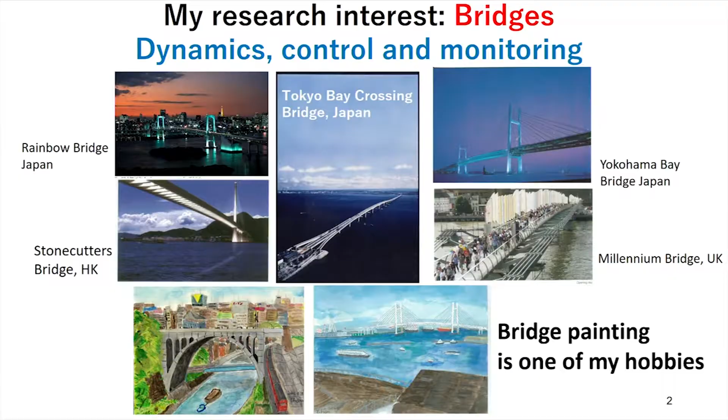So today's topic is wider: infrastructure. We have various kinds of infrastructure. Can I have a pointer here? Yeah, various kinds of infrastructures. This is in Tokyo, Japan.

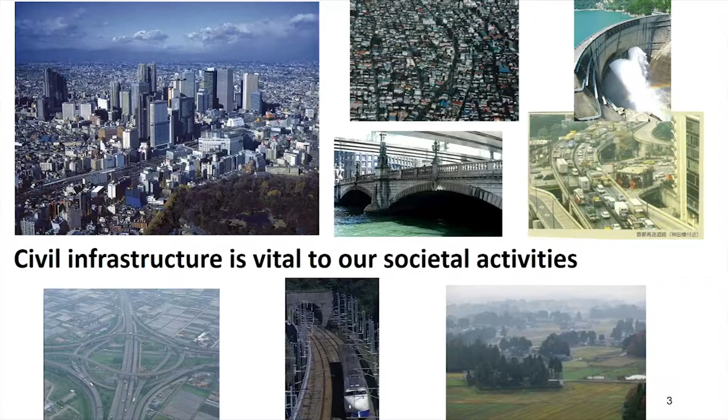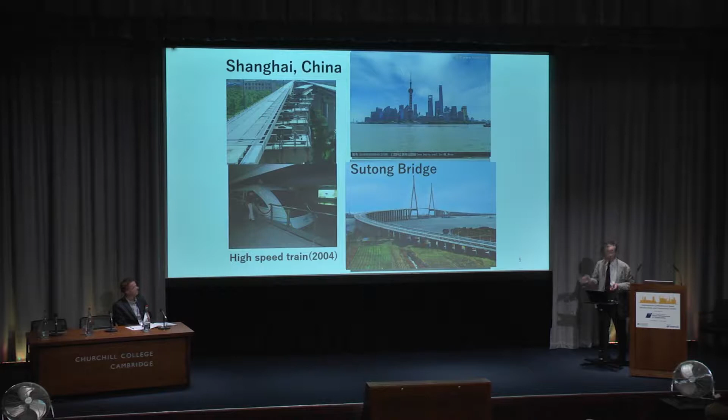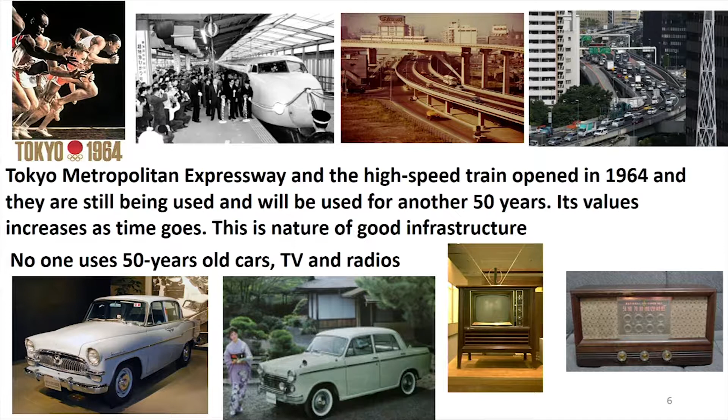Back to Japan, we will have the Olympic Games next year, but we had the Olympics in 1964. That's about 55 years ago. At that time we built a high-speed train and urban expressway, and they are still in use, of course. This urban expressway carries millions of vehicles a day. Even though the structure is degraded and damaged a little bit, the value of the structure has increased, and this is a good example of nice infrastructure.

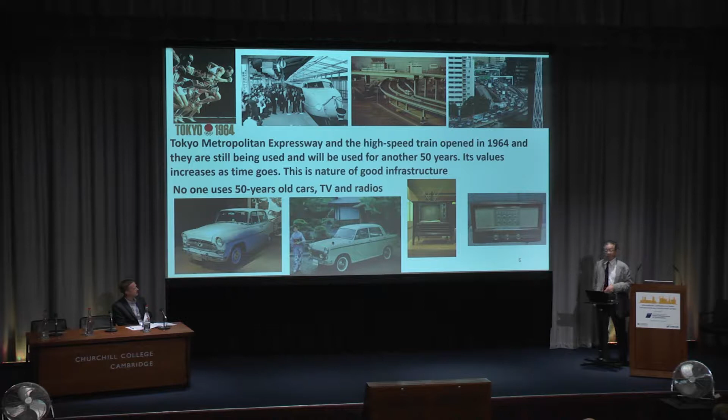One professor, Uzawa, studied in the US, was a professor at Chicago, and returned to the University of Tokyo. He was very close to the Nobel Prize in economics. He proposed the concept of social common capital. According to his definition, this is an asset for the society, public and not private.

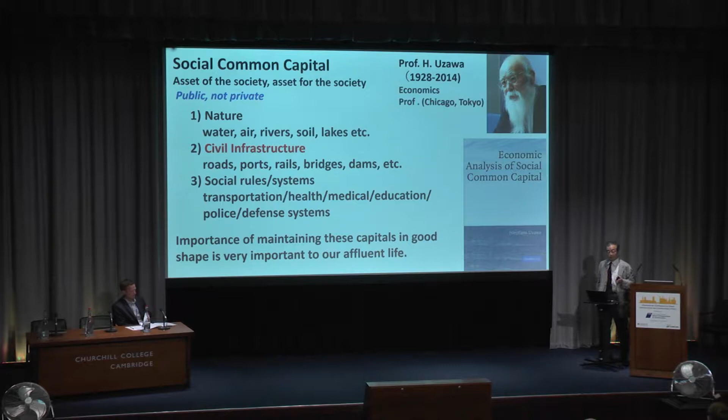He classifies three types: nature, water, air, which no one can own; civil infrastructure, like we are dealing with; and social systems, rules which apply to everybody, like medical care or education. These three are very important social common capital, so our infrastructure is one of them. He stressed that maintaining these capitals in good shape is very important to our rich, wealthy life.

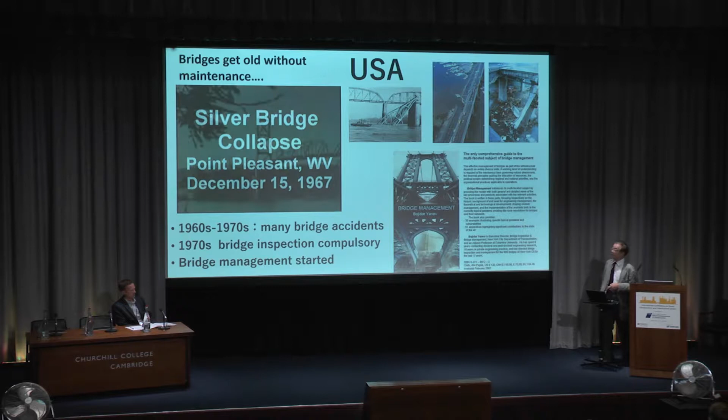The road hung from a simple, elegant chain design made possible by a new type of high-carbon, high-strength steel.

And this is like a chain. This is a chain. Of course, no one inspected it. No one took care of it for many years, 30 years, 40 years. And one day, Friday evening, the bridge collapsed.

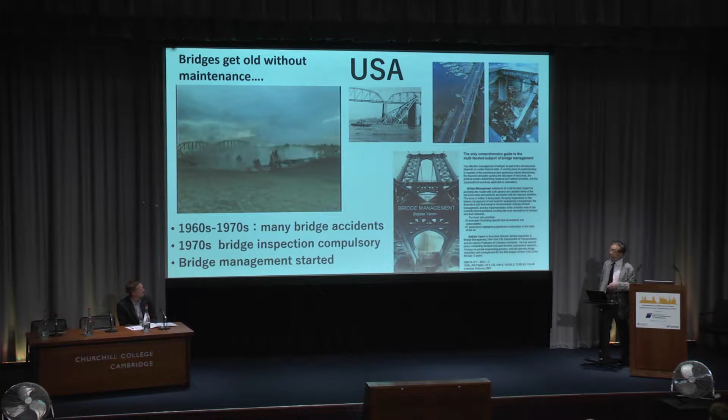It was a Friday evening, so many cars, and 46 people were killed. This is an animation, not real video. The bridge was falling. With this accident, we really realized that we need inspection, we need maintenance. That was the wake-up call in the U.S. After that, there were some accidents in the U.S., and in the early 70s, the U.S. introduced compulsory bridge inspection. So for 40 years, they have been working on bridge management, and there's a book, Bridge Management, written by one of my friends, Yanev. That is the current situation in the U.S.

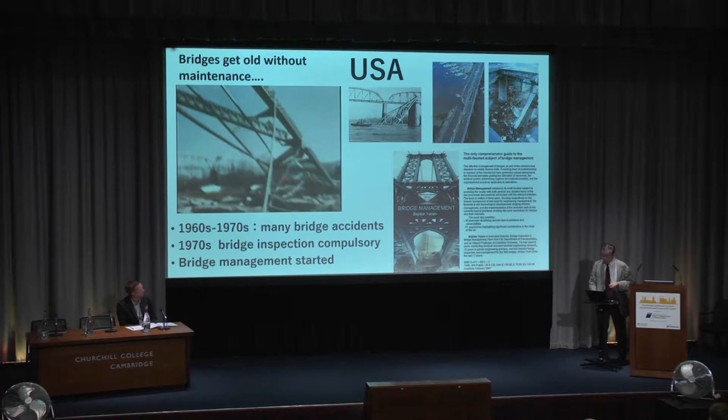Of course, there are many wake-up calls in Europe. This is one example in Vienna. And even last year in Italy, we had a very bad accident, and I think more than 40 people were killed. Of course, there are many reasons, but one reason is that damage in bridges is very often not visible. That's the problem. So we need technical development.

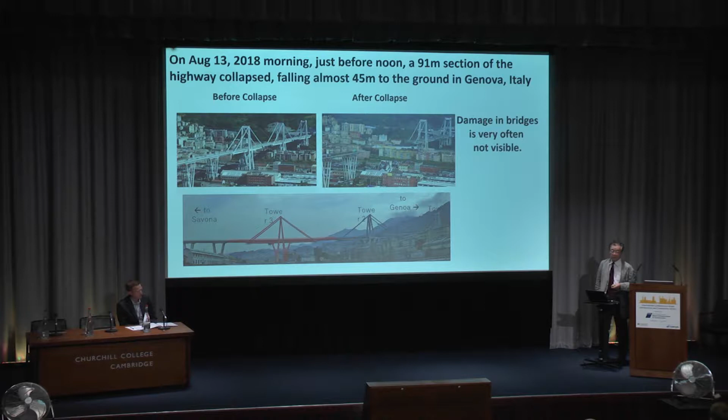This is a video, but I'm not sure this works. It's a video I got from YouTube. The bridge, I think the pylon collapsed. I don't understand Italian, but someone is shouting.

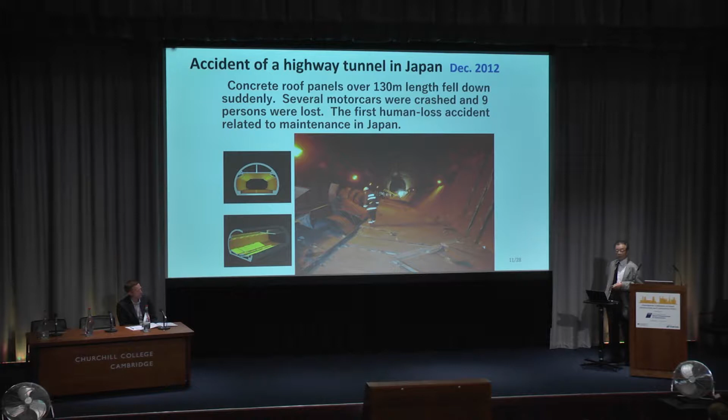Also, we had an accident about 7 years ago. This is a tunnel accident, and there's a roof here. This is an air conditioning, ventilation roof, and it collapsed over 130 meters. Very fortunately, not many vehicles were there. Only 9 people were killed. It could have killed almost 100, because a 130-meter ceiling roof fell down. So I think this was really a wake-up call to the public in Japan.

The Council for Science, Technology and Innovation, Cabinet Office, chaired by Prime Minister Abe, is the top commander in the policy of science and technology. This CSTI identified the safety of infrastructure as one of the nationally important research and development themes.

At that time, in 2013, CSTI proposed to conduct a Strategic Innovation Program with 10 themes. This was the first experience for CSTI to really conduct their own project. Ten projects were selected, and one of them is infrastructure maintenance.

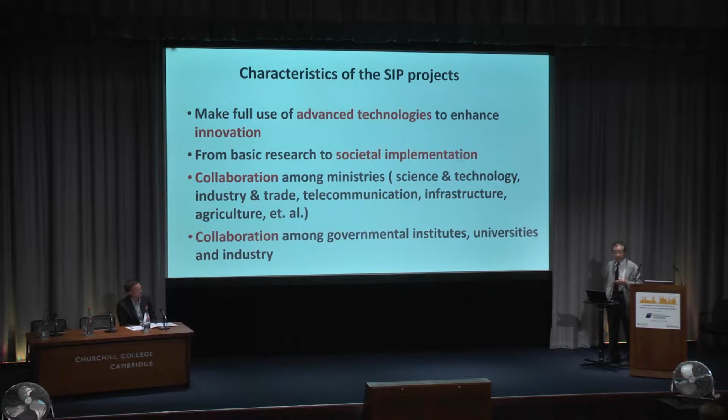The characteristic of the SIP project is, as the government says, innovation using advanced technology. So make full use of advanced technology to enhance innovation. That's one idea. From basic research to societal implementation, so you have to develop and also implement in society. Collaboration among ministries, and among governmental institutes, universities and industry. This is kind of my thought.

30 years ago, we were civil engineering, but advanced technology like nano-bio was much ahead, very far. I felt the long distance between the two groups. But advanced technology also changed. Nowadays, IT, robots, and so on. Now I feel, maybe in the past several years, civil engineering infrastructure and advanced technology are rather close, like this picture.

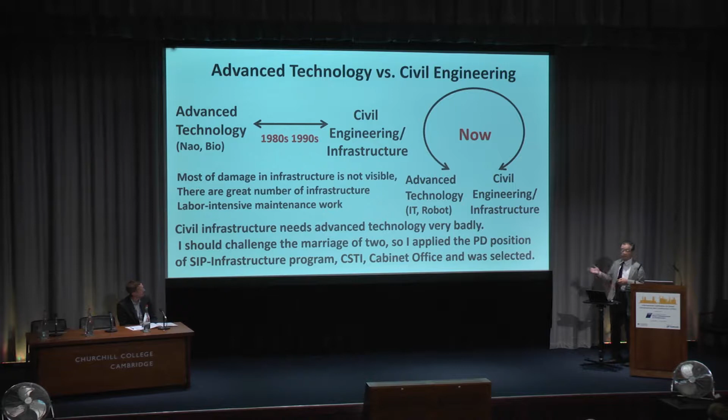And most of the damage, as I said, is not visible. So you need some technology to identify the condition inside structures. There are a large number of infrastructures you have to deal with. At this moment, maintenance is very labor-intensive work. So I thought civil infrastructure needs advanced technology very badly indeed. I should challenge to combine the two technologies. So I applied for the program director position at the Cabinet Office, and I was selected.

Another background is my motto, or attitude to the SIP or research: I think I should follow the past president, Furuichi. He was the first president of JSCE. In his speech in 1914, more than 100 years ago, one of the statements is, civil engineers are to be the leader of leaders, persons who have strong leadership. That means we should coordinate many technologies for civil engineering purposes.

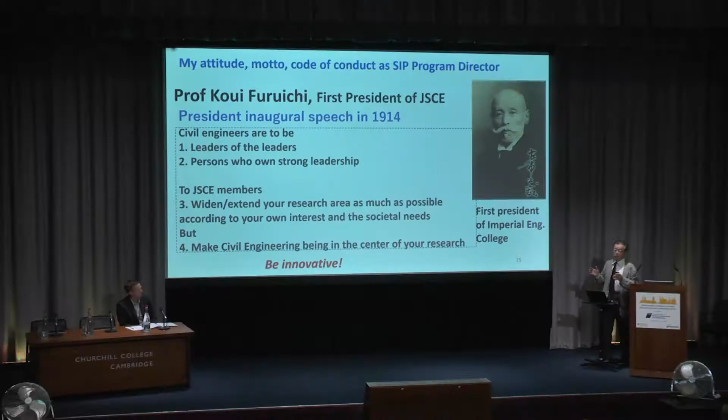Also, he said JSCE members should widely extend your research area as much as possible, according to your own academic interests or societal needs, but make civil engineering the center of your research. So your research should be targeted at civil engineering. That's his statement. I like this statement. So as chair of this SIP, I always keep these words in my mind. He also says that you have to be innovative. I feel this from his statement.

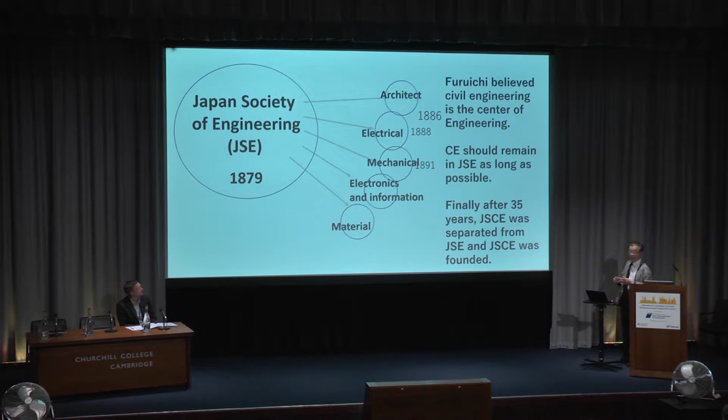A little explanation. Our society, the Japan Society of Engineering, was founded in 1879, so 140 years ago. After 7 years, the architect group separated. After almost 10 years, the electrical group separated. Mechanical, all large groups separated. But Furuichi said that civil engineering should be the center of engineering, so we should stay as long as possible. But finally, after 35 years, in 1914, civil engineers, JSCE, separated. So we stayed, but finally we separated.

Go back to the SIP. At the end of 2013, the 10 themes were selected. Many are driven by large companies like Mitsubishi, Toyota, Hitachi. 5 are from academia and 5 are from industry. I thought maybe the Cabinet Office thought about the balance. I am one of them, about infrastructure.

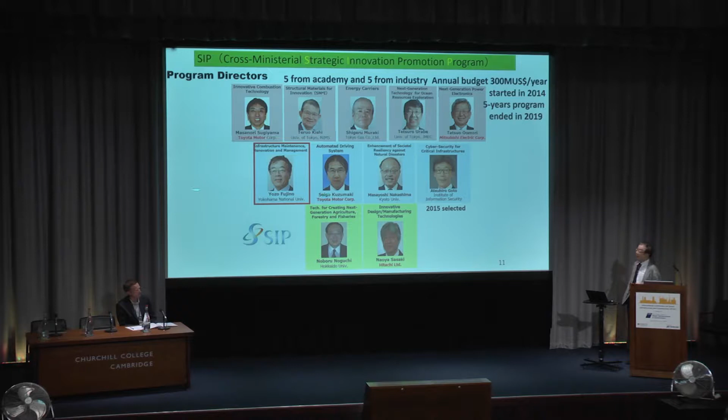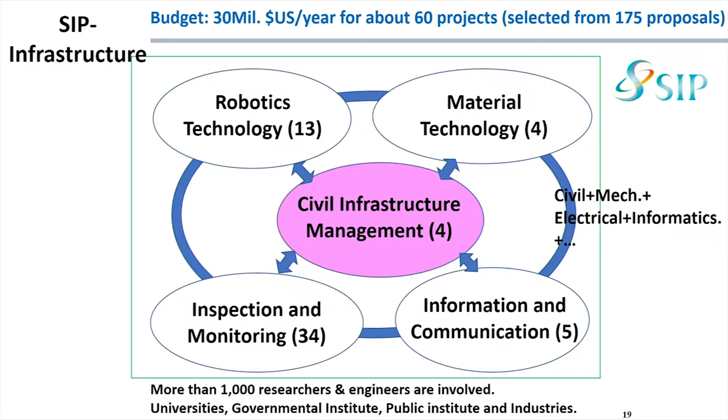The idea of infrastructure is not like a profit kind of organization. They don't create profit, but for others, if you develop some technology, you can get more sales and more profit. Our group is a little bit different. So I classified 5 groups: material, robotics, inspection and monitoring, and information communication.

Many engineers from outside civil engineering joined this project, and in civil infrastructure management, many civil engineers are there. More than 1,000 researchers and engineers are involved, from universities, governmental institutes, and public and private industry. Again, he said the center should be civil engineering. That's why I put the civil engineering group in the center of the SIP.

We made a very strong steering group, with me, the sub-program director, and members from government, industry, and university academics: robotics, electronics, civil, mechanical, control, materials, including management and economics professors. I asked them to join to supervise my project.

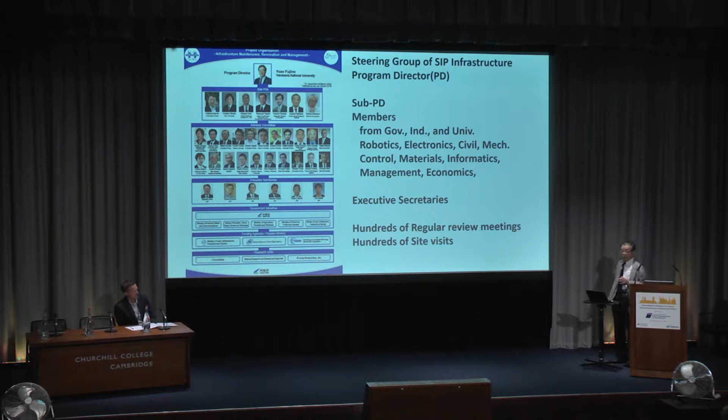We have many, many review meetings, and some projects we have to decline. Maybe 20% of the projects we stopped midway. And hundreds of site visits. So actually, this is the distribution. I'm sorry it's in Japanese, but civil is half of it. The rest is non-civil.

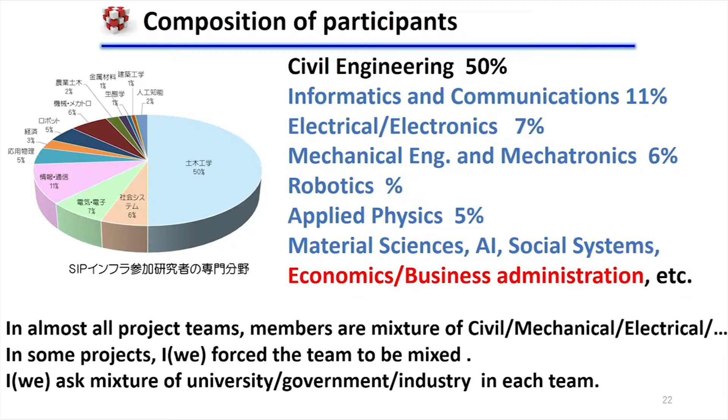Of course, like informatics, communication, electrical, applied physics, material, even economics and business administration. That's the composition of the project members. So in almost all projects, members are a mixture of civil, mechanical, electrical. In some projects, I forced them to be a mixed group. And we asked for a mixture of university, government, industry as much as possible. So I thought that the good combination is very important to develop a new technology, a new system.

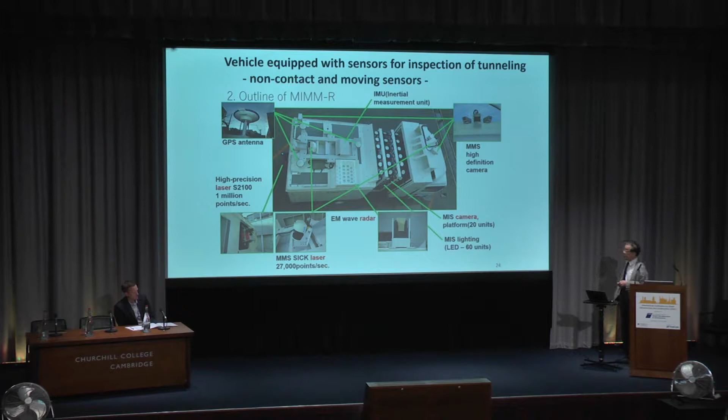So just to explain a little bit about some output of the project. Tunnel inspection. So we developed a vehicle which installs a camera, radar, laser, and so on. At a speed of 50 kilometers per hour, they inspect all the surface of the tunnel. And after that, automatically they give the data result, so that we can go to the screened inspection. That's used for the screening of the inspection.

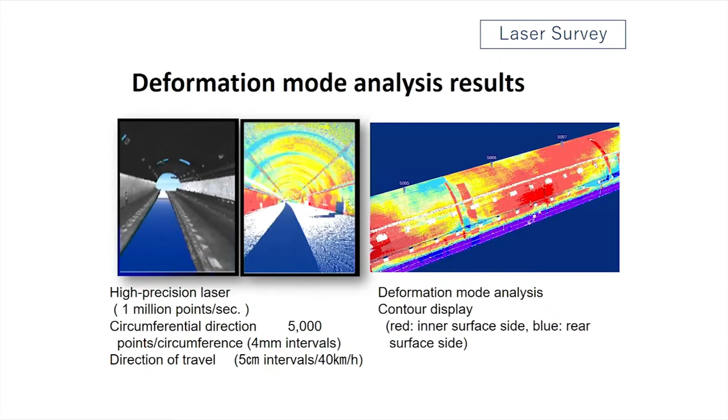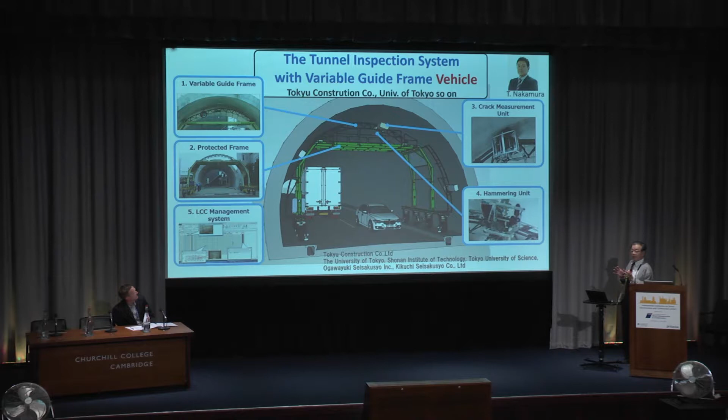This one is organized by Nakamura in the Tokyu Construction. And this is a tunnel. And they made a frame, which is a movable frame. And they do, this one is a measurement, I think, the image, vision, and also the hammering. But the point is, you allow the vehicles. Usually, you close the lane so that you have a traffic jam. But they like to have the system which allows the traffic through.

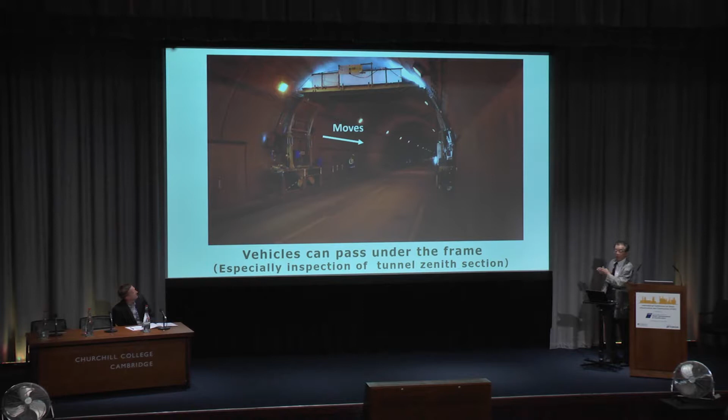And actually, we did some experiments in the real tunnels. I thought police would not accept this, but actually police agreed to use this one under traffic. I like this. Also, this frame moves. So one day, one night, keep going and finish the tunnel inspection.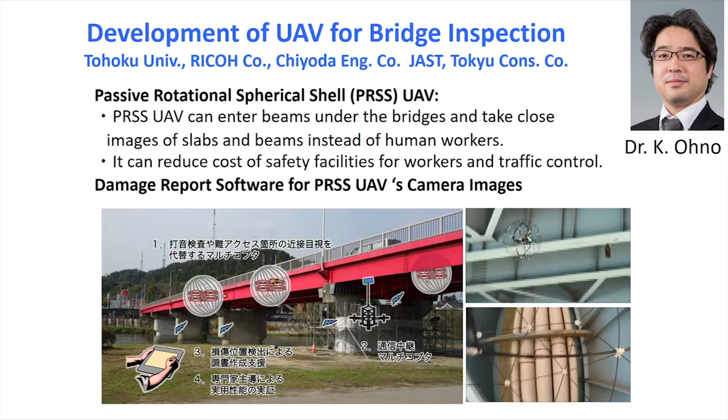A drone is very common. We have many projects on drones. And this drone is developed by Professor Ohno in Tohoku University. And this drone goes to the backside of the slabs and takes a photo and so on. So this is a drone photo. Another type of drone is a two-wheeled flying robot like this. I'll show you the video.

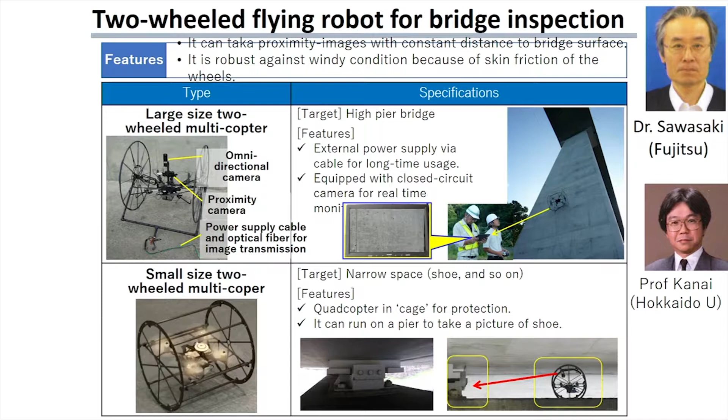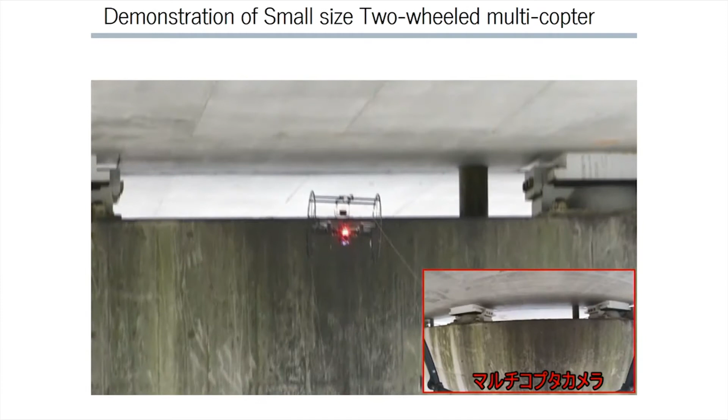So this is a high bridge pier. And usually, when you inspect, you use a rope. But this one is two-wheeled. So you go up and take a vision image. That's the way they inspect the high bridge pier. This is a steel bearing, a small one. So you can go up there and inspect this bearing. And after that, all the vision information is digitized and stored in a 3D CAD model. So that's the way everything is automated.

Most difficult is to implement developed technology from SIP to actual maintenance site works, especially in local government. Because local government is very often reluctant to adopt new technology because there are no engineers. They don't know engineering or technology much. So we need to promote our SIP infrastructure technologies in this local area.

How? We opened a kind of branch. I'm in Tokyo, but we opened 12 regional branches, introduced in the middle of SIP. Regional representatives are mostly universities, because universities can talk to the government people and to the private industry people, so it's a good position, we thought. So we asked the professors to promote our technology regionally.

So this is Professor Rokugo in Gifu University. They have seminars, workshops, demonstrations, lectures, all these kinds, to let local government engineers and people know our technology. And sometimes we get feedback to improve our technology. That's the way we did it.

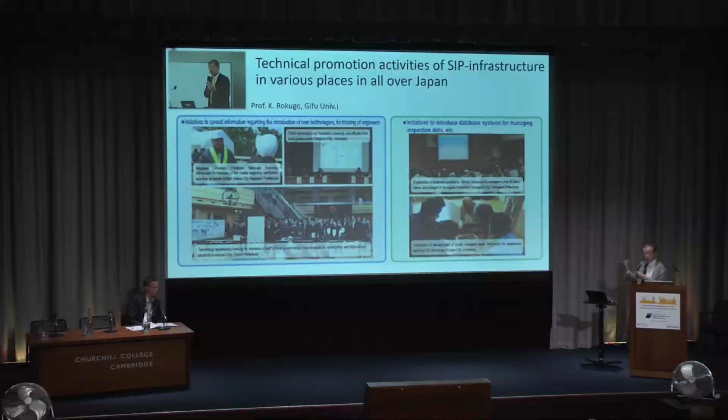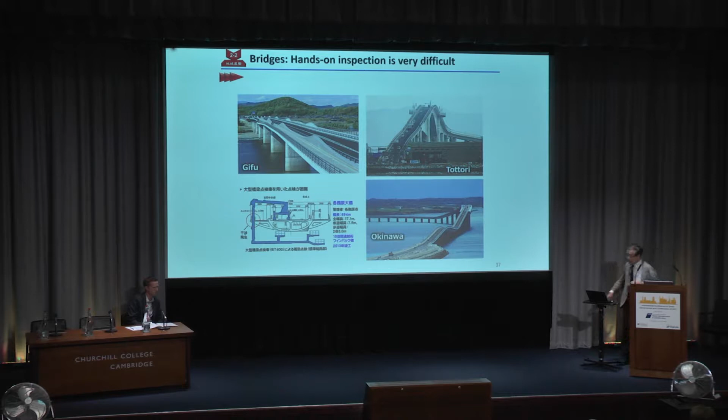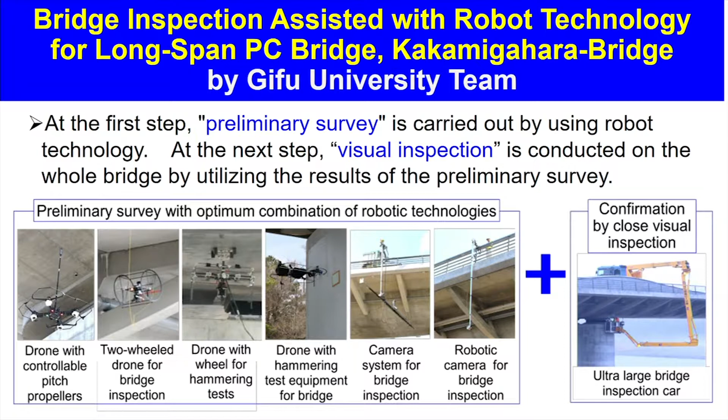Some bridges in the local area are large, and it's difficult to inspect. Not impossible, but very expensive. So what we did is we asked all the participating project leaders, with various kinds of robots, to join this demonstration. And this is one example, a bridge in the central part of Japan. Of course, traffic goes through, so not disturbed, no traffic jam. That's a very nice thing about the bridge inspection. Usually, you have to close the lane and there's a long queue.

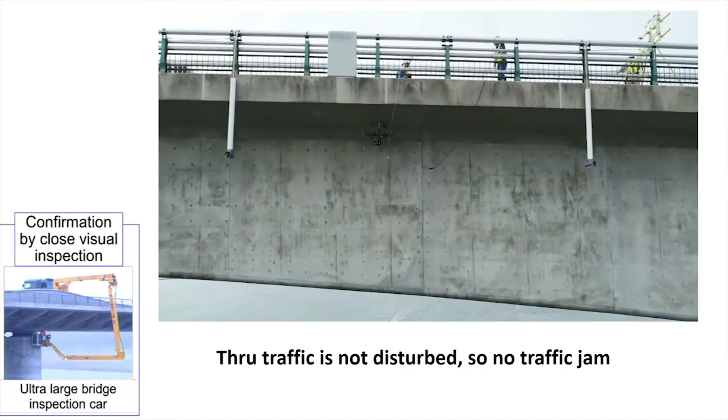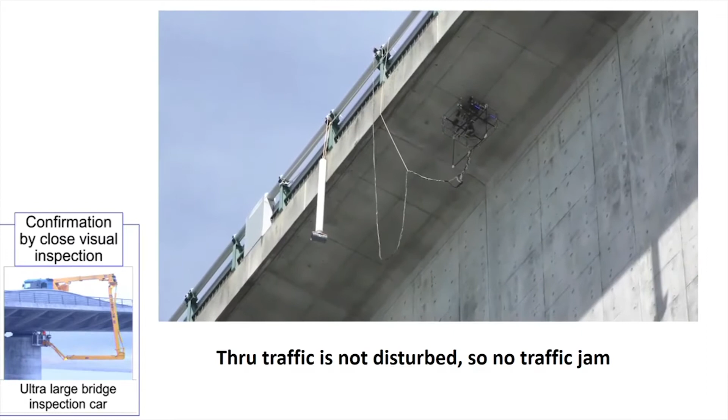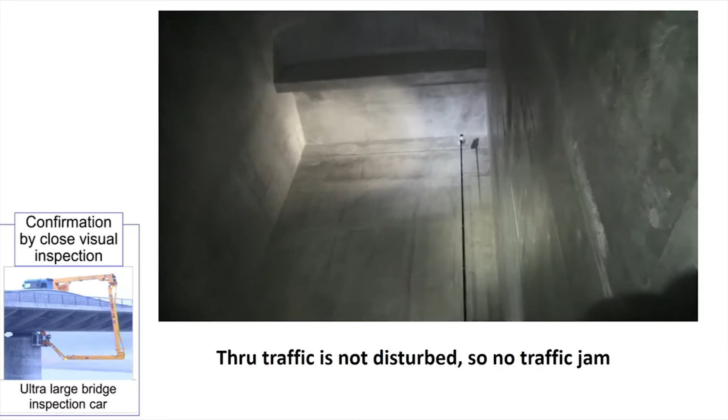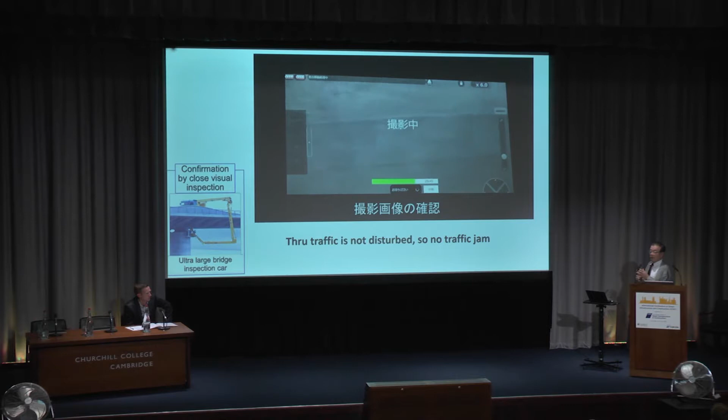So that is with a hammer robot. This is a hammer. So this is a drone in contact with the backside of the girder, and they hit. And all the data is recorded here. That is a rather simple inspection pole for high roofs. So they take a video, the image, and they superimpose it after that. And of course, most important is the width of the crack, the density of the crack, and so on. This is, again, a two-wheeled robot.

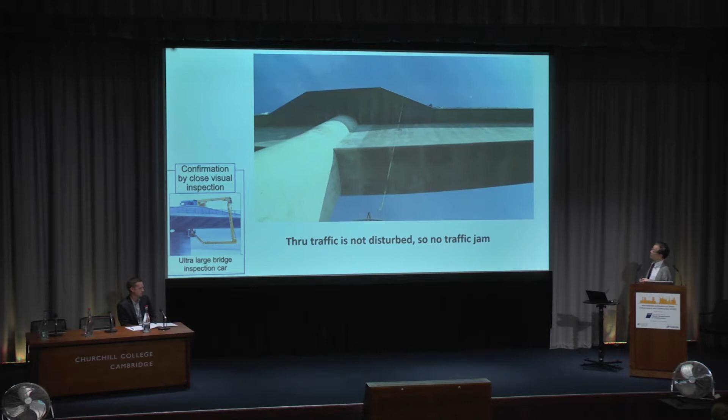Our project is finished. SIP finished at the end of March, but some of the output is now actually being used in local government. That's nice.

So I finish. And as I said, some part of our structure, the damage is not visible. So I try to visualize the damage inside the structure. This is a high-sensitivity magnetic sensor for steel structures by Professor Tsukada, Okayama University. His major is physics. So if we didn't have this SIP, he would not join this kind of project.

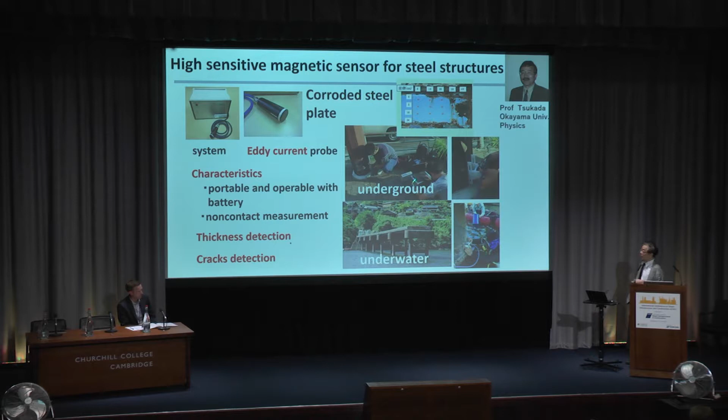His area is physics, but he's keen to develop the sensor probe using eddy current, to detect the cracks and also the thickness of the steel plate, even with painting. The nice part of it is even underground, through the soil, they can measure the thickness of the plate. Even underwater, through the water, they can measure the thickness. Usually we use ultrasonic, but ultrasonic doesn't work in this kind of situation. So that's the advantage of it.

Also, this is a lady, Dr. Otake in the science laboratory, Riken. Her major is also physics. But she used the neutron beam inside the concrete to visualize whether there is any water or whether the steel bar is corroded or not. This is not a popular technology yet, but under development. But this is a very challenging technology.

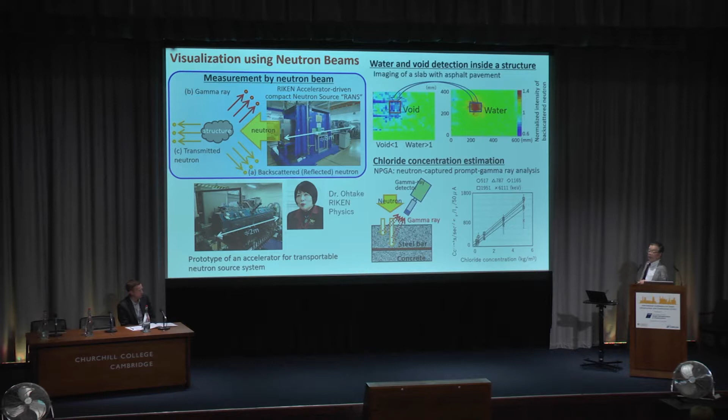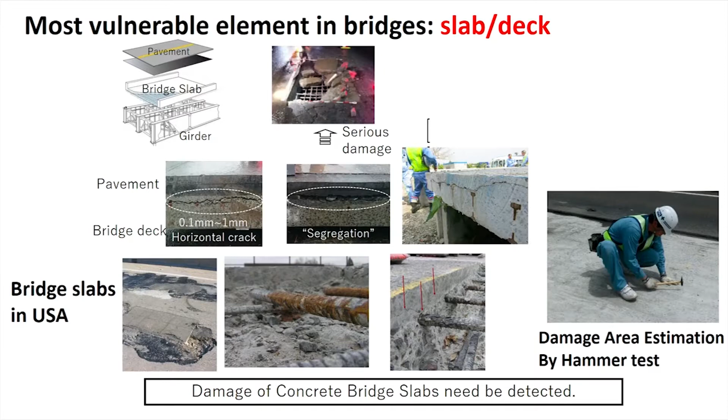Third one is bridge deck inspection. The most vulnerable element in bridges is the slab and deck, in Japan and also in the US. So cracking, segregation. If you have this crack, it's very dangerous. We would like to know whether there's a crack or not. But the problem is you cannot see from outside. So usually we use hammer technology, the change in the sound.

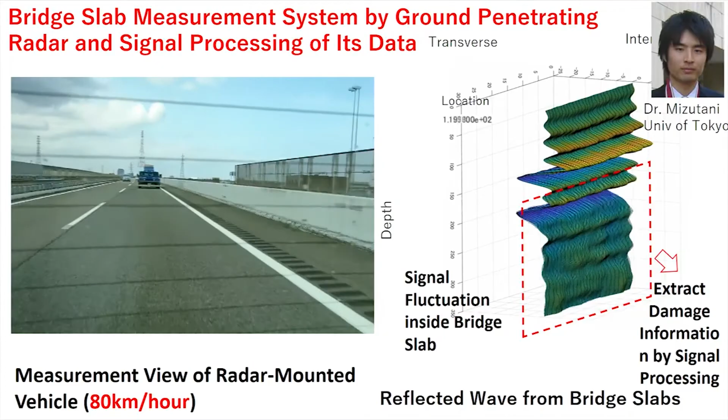But one of my students used electromagnetic ground penetrating radar with velocity 80 kilometers per hour. Again, you don't need to disturb the traffic. I think he stayed for a while in Cambridge University under Professor Soga. So there is a reflected wave, and he analyzed it. He used a very high level of signal processing technology. I don't know the detail yet, but if there's water or a crack, he can identify it by very advanced signal processing technology.

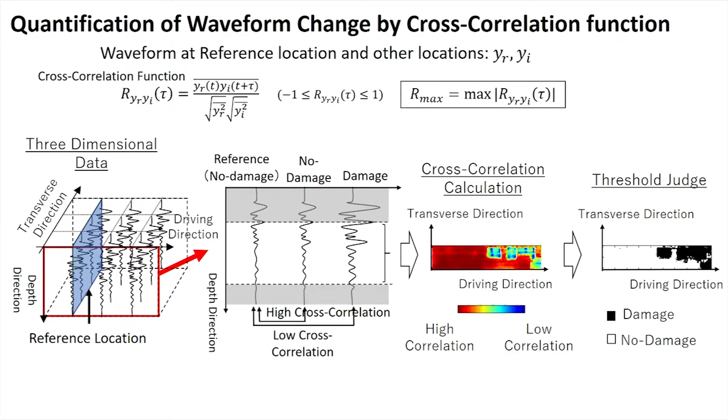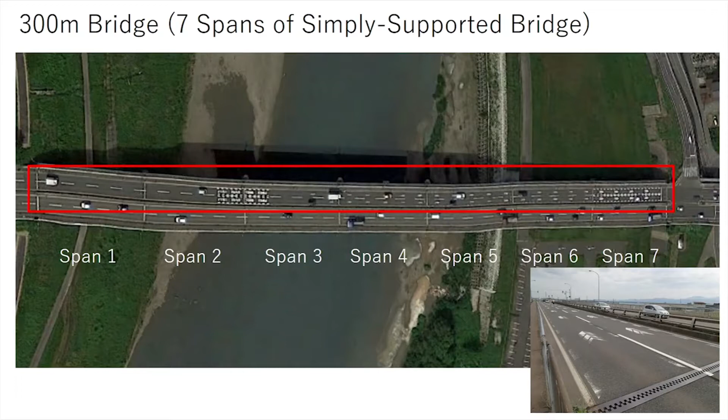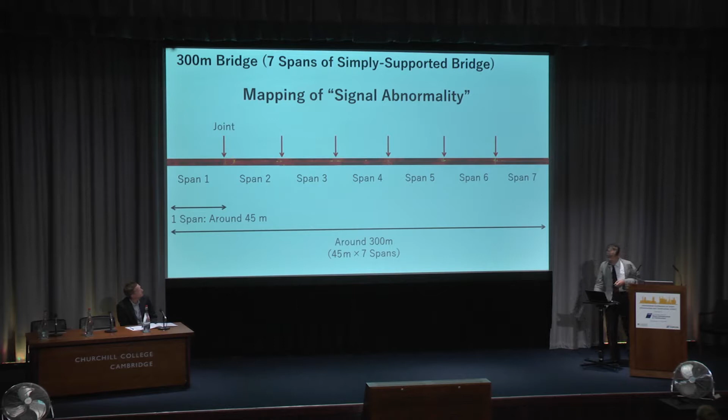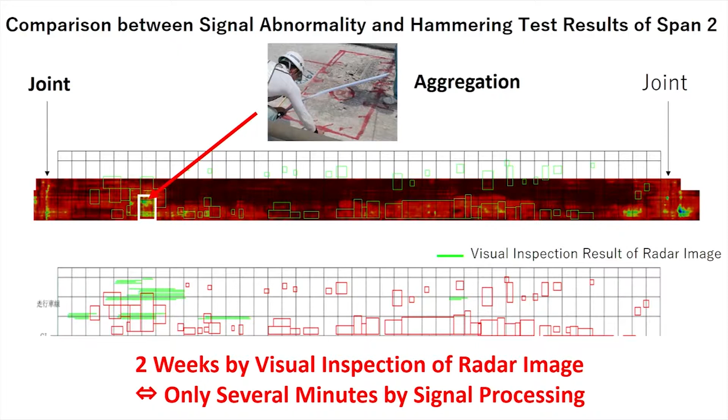But we would like to know whether this result is true or not. We do hammering and check whether there is any damage or not. And we compare the damage result from the radar and the actual hammering, and we found a very good agreement. And we repeat this kind of practice in many places to ensure the result is okay.

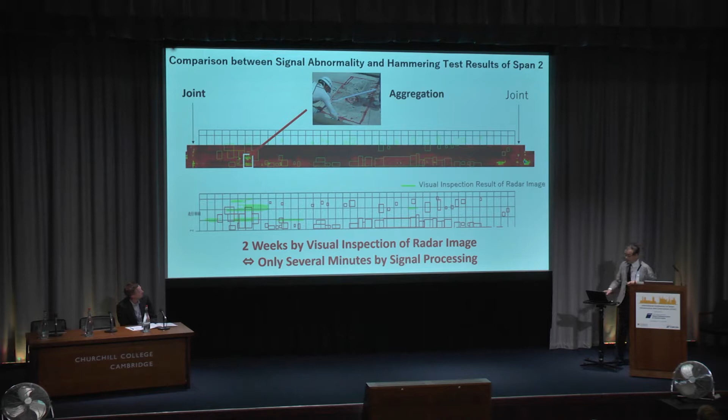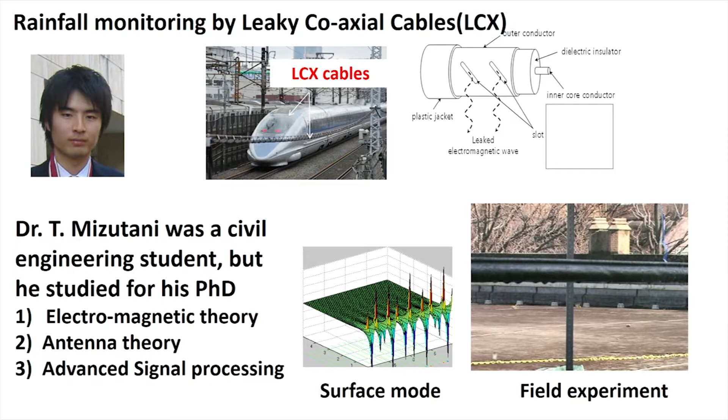So he studied this experimentally and theoretically. But he had to study electromagnetic theory, antenna theory, and advanced signal processing, even though he has a civil engineering background. So he spent 3 years studying, going to electrical engineering and sometimes others. So he's ready to do this research. He has a good background in civil engineering and also other disciplines.

So we identify the damage with many monitoring or inspection methods. Finally, we would like to know whether our structure is sound, or what is the residual life. So this is Professor Maekawa's achievement, prediction of the residual fatigue life of reinforced concrete bridge slabs. He was one of my colleagues at the University of Tokyo. He's now working at Yokohama National University. He has spent almost 30 years to construct and develop a multi-scale concrete model, from the nanoscale to meter scale.

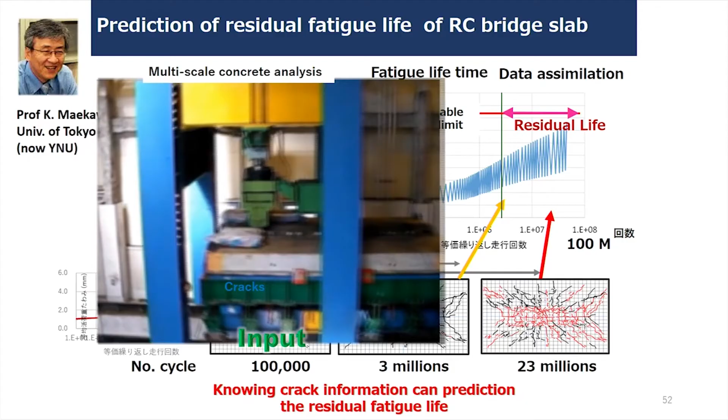And we are concerned about fatigue from repeated vehicle loading. With repeated loading, the deflection increases gradually. I'm sorry, this is in Japanese, but the deflection increases as the number of repetitions increases. So this is an experiment. This is a prediction by this multi-scale model. So good agreement. Same here.

This is an experiment with the number of loadings, 1 million, 10 million, 100 million repeated loadings. So deflection increases gradually. Reaching a certain level, we judge this slab has reached its fatigue life. Now, if you test, the backside of the slab has some cracking. So if you have cracking, give this as an input for this slab and predict by this model, and you have this overlapped. If you have 3 million more repeated loads, you have more cracks. Give that as an initial condition and predict again.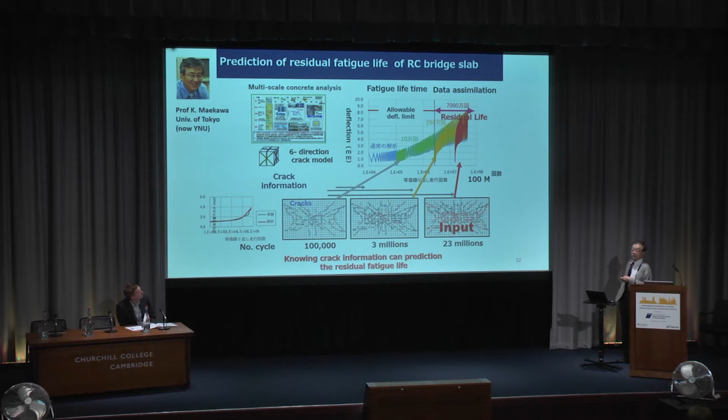So that means if you know the cracks, regardless of the past loading history, we can predict the residual life. That's a very amazing result. So the only thing is, by drone, we take a picture, digitize, give the input and predict. So we establish prediction of the fatigue life.

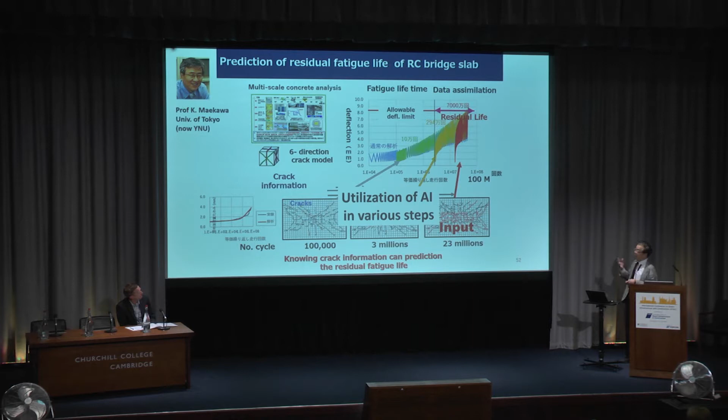Also at that time, maybe 3 or 4 years ago, AI came up. So we also use AI technology in many places to simplify the process. Of course, on many occasions this is discussed. We measure the physical world in many ways, send all the data and models to cyberspace, and we analyze it. And this analysis tells you the lifetime prediction or condition assessment. That is the way we should go.

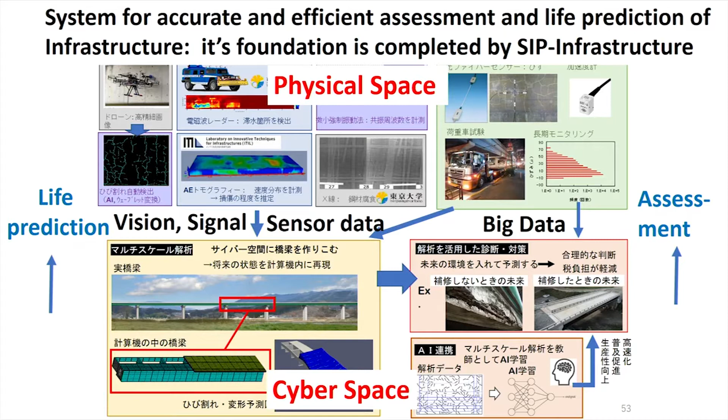And this system for accurate and efficient assessment and lifetime prediction of infrastructure, its foundation is not completed yet, but the foundation is completed by our SIP. I keep saying to the members of our SIP group, this is our target: better and efficient infrastructure management. To achieve this, what do you need? Of course, you need structural engineering knowledge, materials, sensors, robotics, communication, informatics, all these advanced technologies. So we develop the integral technologies and systems we would like to use.

And if you can make it, we say maybe you achieved innovation. But combining various technologies, maybe not all, selectively, is a nice way to go. So I think it's a kind of new civil engineering challenge. We have to produce young engineers who can integrate new technologies for civil engineering purposes. So I'm a bridge engineer, but more important is not the bridge. Bridging is more important.

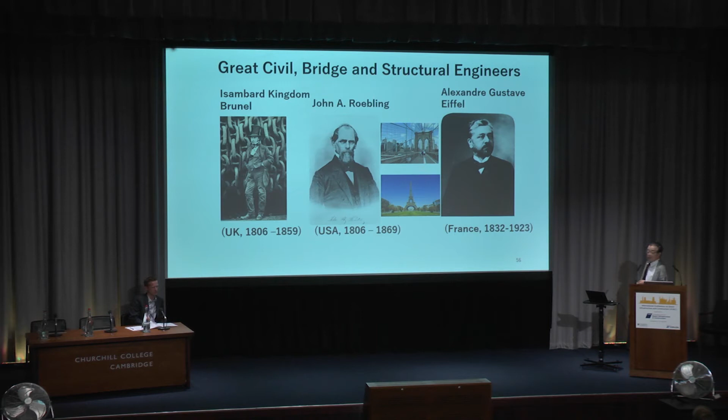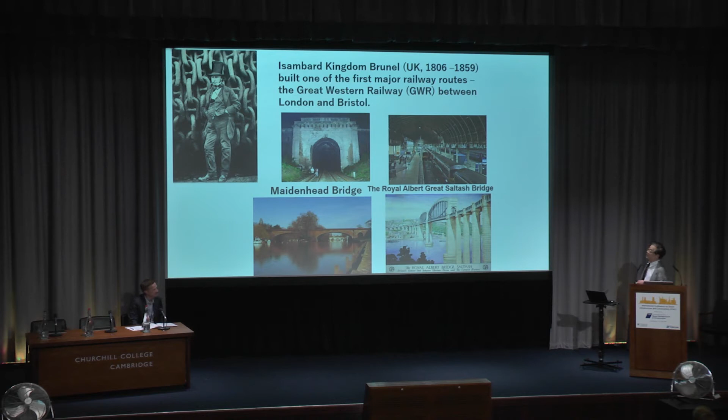So innovation is highly expected in probably every area in the world. Civil engineering, unfortunately, is often conservative and a bit away from innovation. So let's look at the great engineers in the past. For example, British engineer Brunel, or Roebling in Brooklyn, and Eiffel. In front of UK people I don't need to explain it, but Brunel wanted to have transportation from London to New York. So he built tunnels, I think Paddington Station, bridges, all kinds of structures.

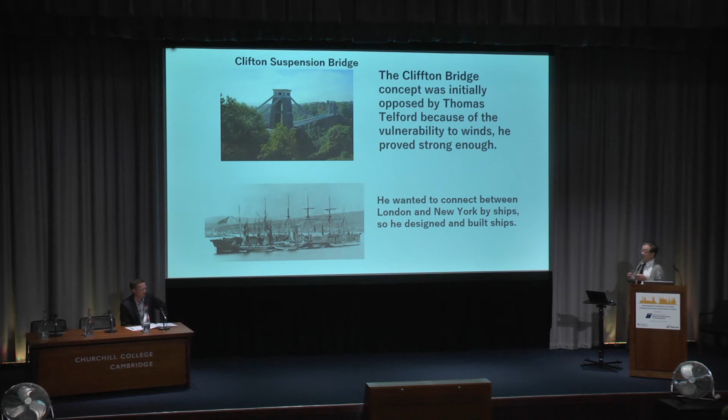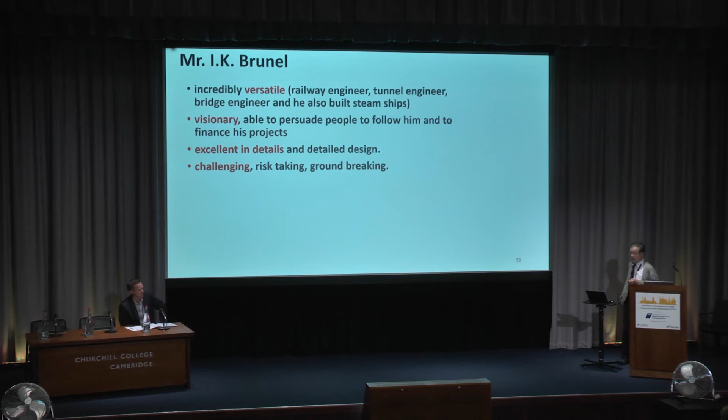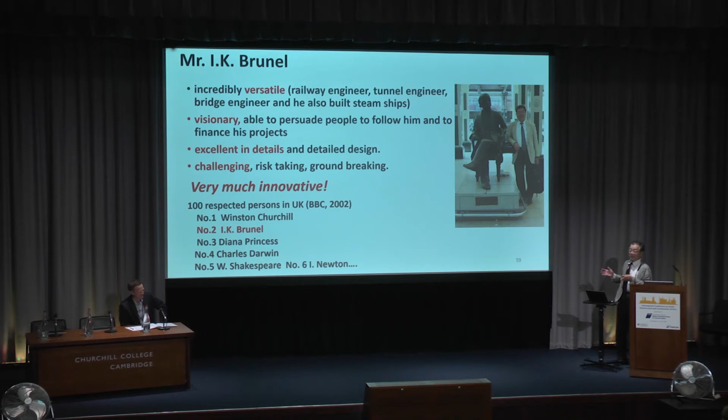Sometimes he was opposed on the bridge, but he convinced them and made the Clifton Suspension Bridge. And he also needed ships to go to New York, which he designed and built. So he studied various subjects, and he made it. Brunel is incredibly versatile, very visionary, excellent in details, and challenging. So I feel he's a very innovative person. This is him at Paddington Station. I heard that in a BBC survey some years ago, maybe 15 or 17 years ago, he was number 2. I'm very proud that an engineer is number 2 with the public.

There are other examples, like Robert Maillart in Switzerland, or Italians, but I would like to explain a little bit about Hiroi from Japan. The North Breakwater in Otaru, Hokkaido is now complete and has existed more than 100 years. It was supervised by Hiroi-san. He was originally a steel structure person and wrote a book in English more than 100 years ago. But he was asked to be the construction supervisor of the Otaru North Breakwater.

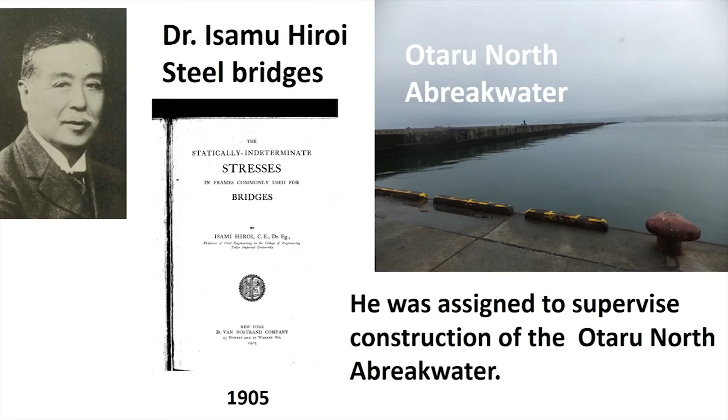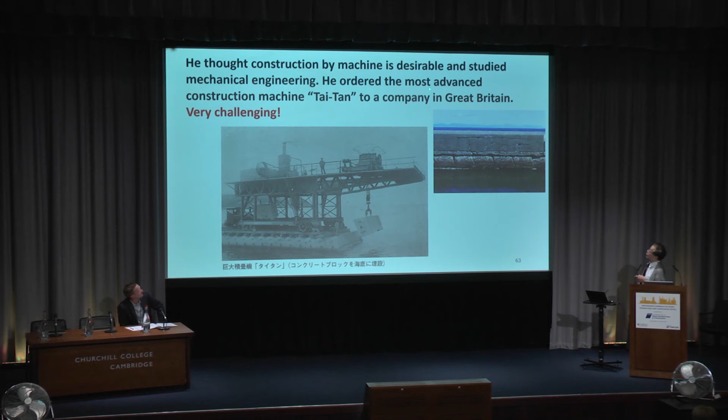He studied mechanical engineering, and he thought we should develop a machine to construct this breakwater. Otherwise, the human work is too much, probably endless. So he ordered the most advanced construction machine, a Titan, from a UK company, very challenging, and of course this breakwater still exists. At that time, the government said cut costs. So using volcanic ash, Hiroi developed a new, less expensive concrete for the marine environment. Volcanic ash is very cheap, right? But he was not fully confident about the long-term performance and durability of this concrete.

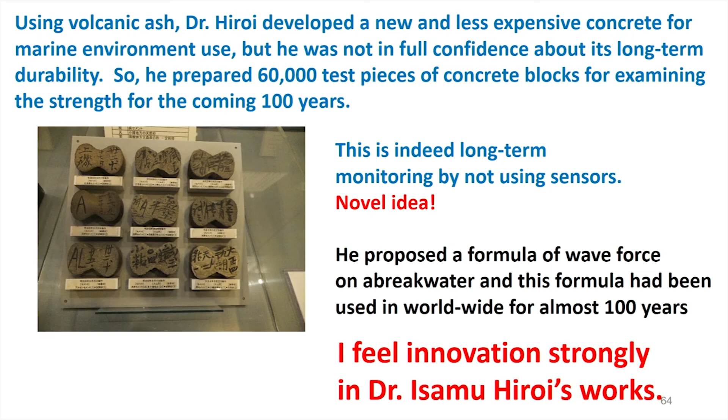So he prepared 60,000 test pieces inside the water, and every year they test 100 to make sure the strength is adequate. Still now they are crushing pieces every year. So this is not using sensors, but it's still like monitoring, a very new idea. He also proposed a wave force formula, the Hiroi formula, which has been used worldwide for almost 100 years. So he was very talented. I feel innovation strongly in his work.

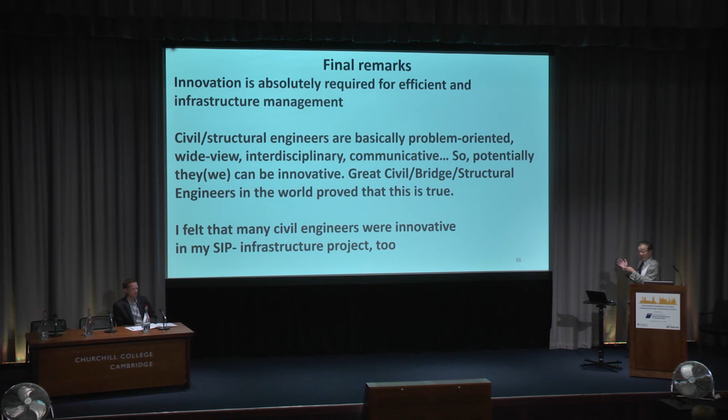So this is the end of my presentation. Innovation is absolutely required, even for our infrastructure management, to be efficient and lower cost. Civil structural engineers are basically problem-oriented, have a wide view, are interdisciplinary, and communicate with other engineers. So potentially, we civil engineers can be innovative. And the great past civil engineers, bridge and structural engineers, as I explained, are very innovative indeed. And I really feel through my experience of SIP that civil engineers, half of them, are very innovative in the SIP project too.